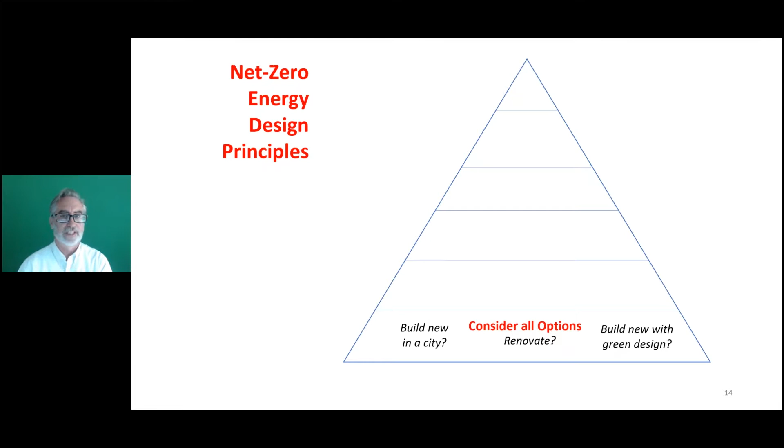So I like to focus on principles. The other panelists are going to really dig into the details of net zero. But today I want to just start you off with some principles. How do you think about net zero? The first thing you do is you consider all of your options. Should you build new in a city? Should you renovate? Should you build green out in the middle of a wonderful environment? These are questions that have to be carefully considered. Where we build and how we build has a tremendous impact on our carbon footprint.

Then we want to consider future adaptability. It's not just designing a house for now that works for the family as is, but what does a building look like that lasts for hundreds of years? And one of the things you want to do is think about how our needs will change. Certainly during the pandemic, of all times, we've seen how radically our lives can change so quickly. Good net zero architecture is going to consider flexibility to make the building last longer. And then we're going to go in and use all of these amazing passive design approaches, things that we've known for centuries.

And we've sort of forgotten in our alliance with technology, and now we're rediscovering it. The way a building faces the sun, or doesn't, has a large impact on the energy footprint of a building, not to mention our own comfort inside.

So we want to max out all of our passive technologies, because we do those once. We put a shading device on a building, we do that once, and we have it for years and years. These are passive technologies that are really critical.

And then even before we get to tech, we've got to look at the envelope. Air is moving inside and outside of your building at rates that are really causing you to use a lot of heating and cooling, and therefore emitting lots of CO2 into the atmosphere. If we can rethink our building envelopes, make them tight, make them efficient, we're going to see tremendous savings and tremendous environmental improvement.

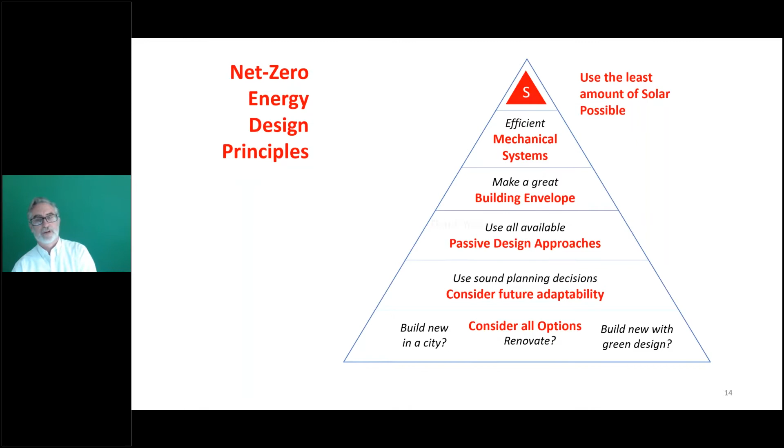And Edgar Stach, please tell us what you do. Thank you, Rob, for the introduction. So I think you really opened up the floor for talking about sustainability in a broader sense.

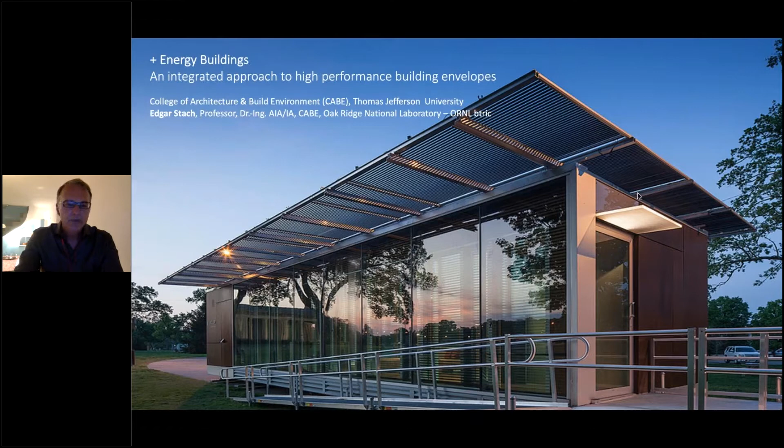Sustainability, and net zero, really goes from an urban scale to a building scale to a device scale. I want to present here quickly not only a zero energy building, but an energy plus building. This was a prototypal building built at the University of Tennessee, in collaboration with Oak Ridge National Laboratories.

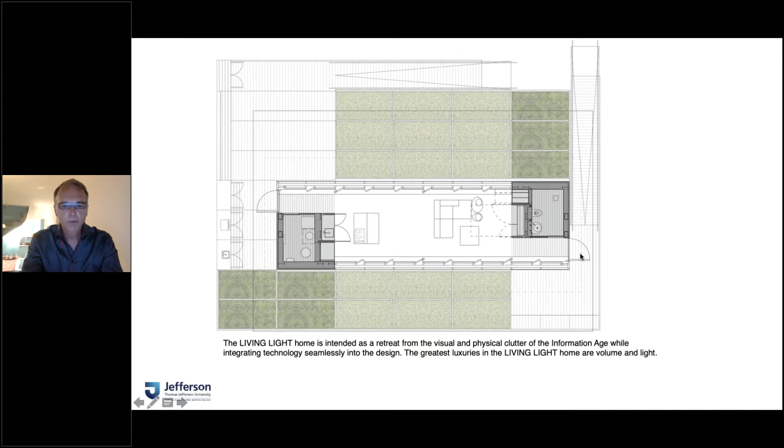It really is sort of a mini test bed to showcase what is possible today to move forward with energy recovery and technology. This is sort of a laboratory building which has two cores and a glass envelope all the way around. It's really meant to be a small starter home, or a unit which can be stackable.

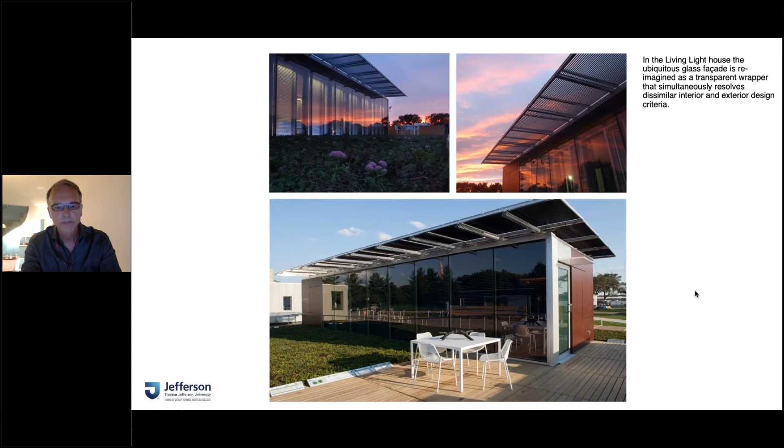So just a few images. Here you can also see the photovoltaic cell technology floating as a sort of scaffolding above the building. It's a pretty clean glass envelope on both sides. Some of the interior shots.

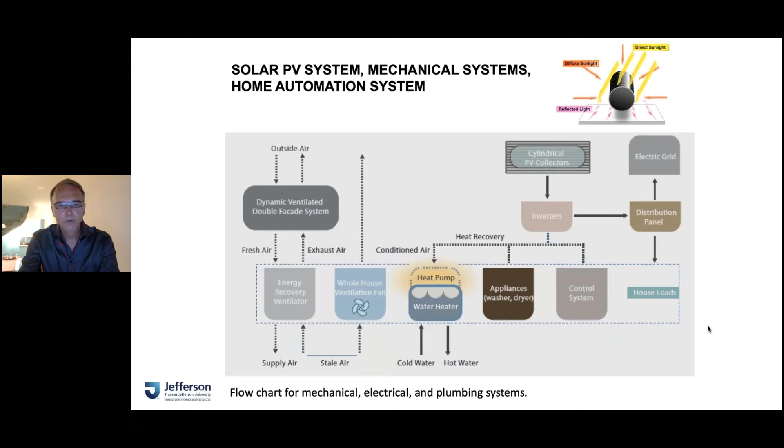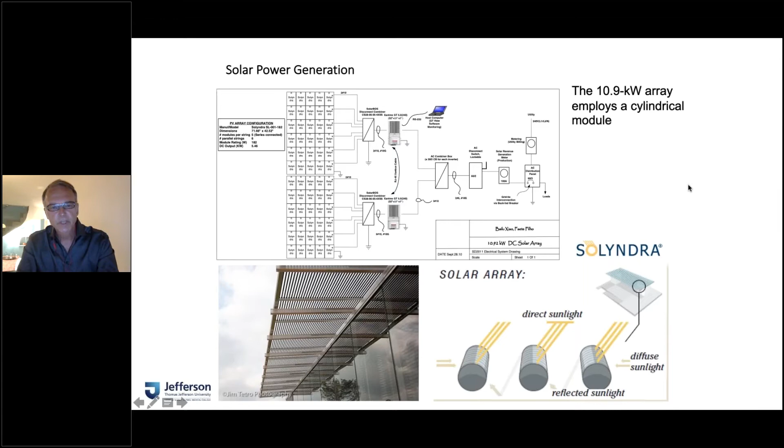So the whole house was powered by a 10.9 kW photovoltaic cell system, and these cells are cylindric. The company was Solyndra, which unfortunately went underwater a couple of years ago. Also, we use these cylindric photovoltaic cells as a shading device for the facade.

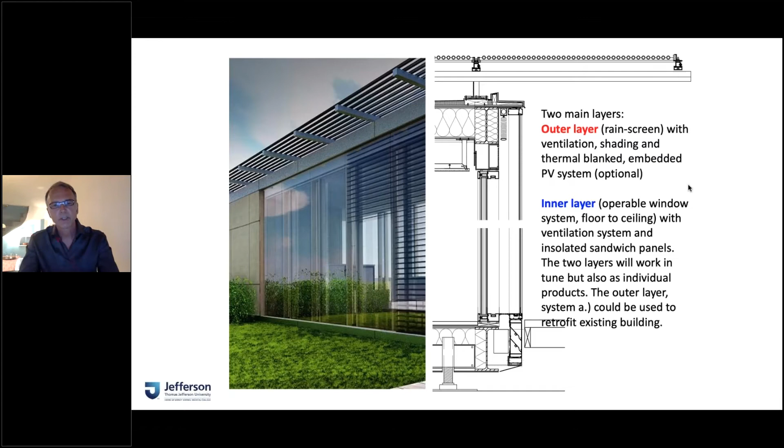The facade itself has two layers with about a foot of space in between - an inner quadruple glass layer and an outer single glass layer - and the space in between works as a greenhouse or buffer zone, so passive heating and cooling could be achieved through the facade.

And then finally, the facade panel was also linked to an air conditioning system or ventilation system, so the passively warmed air can be used inside the building for heating or cooling it.

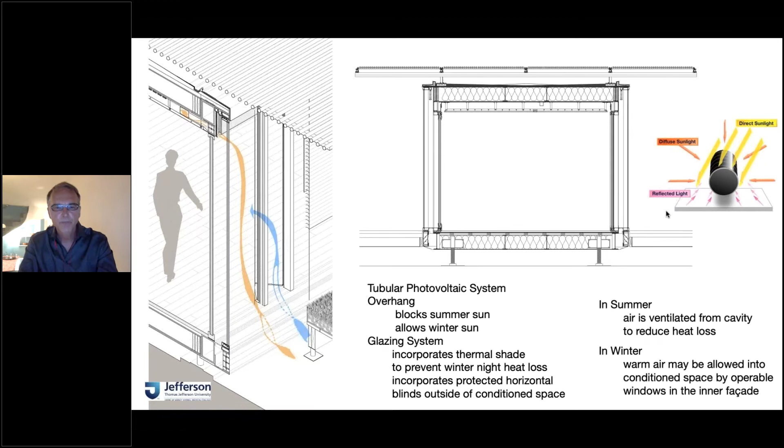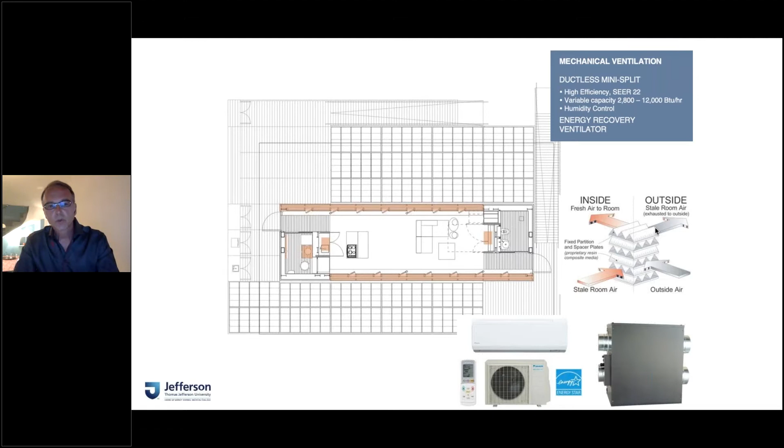We also used systems like energy recovery ventilators, a device which ventilates your house in winter or summer while recovering the energy embedded in the air. In summer, you keep the cold air inside, so you're ventilating without losing the energy embedded into the air.

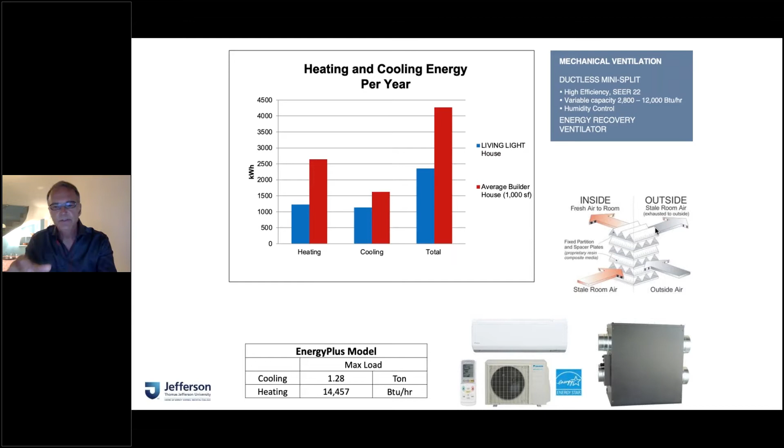So what does that actually mean in terms of savings? With technologies like energy recovery, a tight building envelope, and good insulation, this house used only half the energy of an average house built today. That's a huge energy savings, and with the large photovoltaic system on the roof, at the end of the year, you actually make money by using that technology.

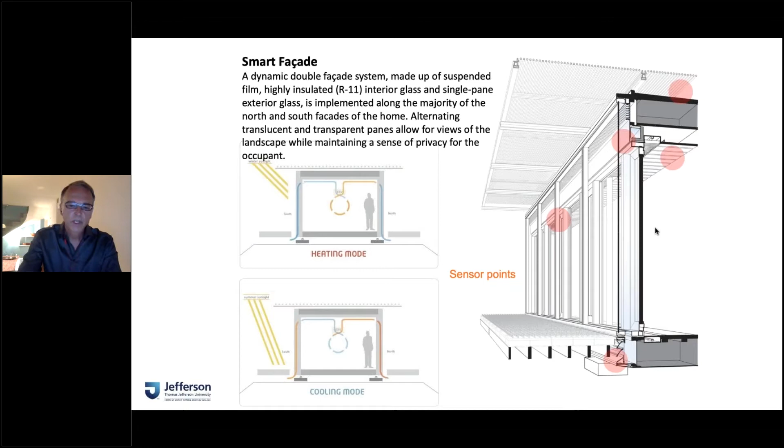So the complexity is really in controlling all these mechanisms, like the photovoltaic cells, the ventilation systems, the blinds, and so forth. You need a control system to monitor and control these things.

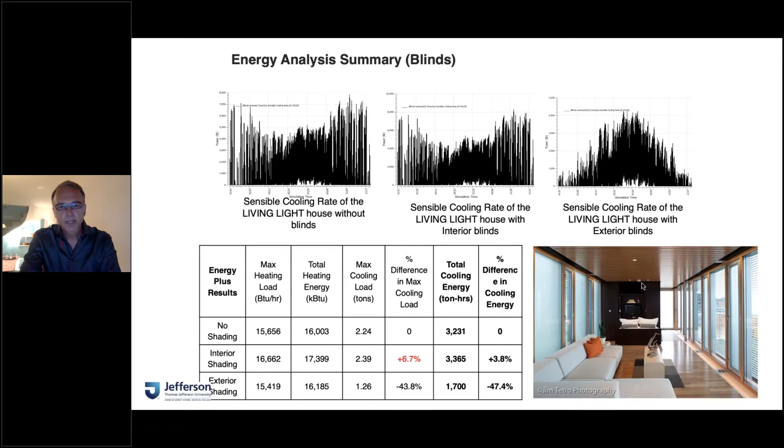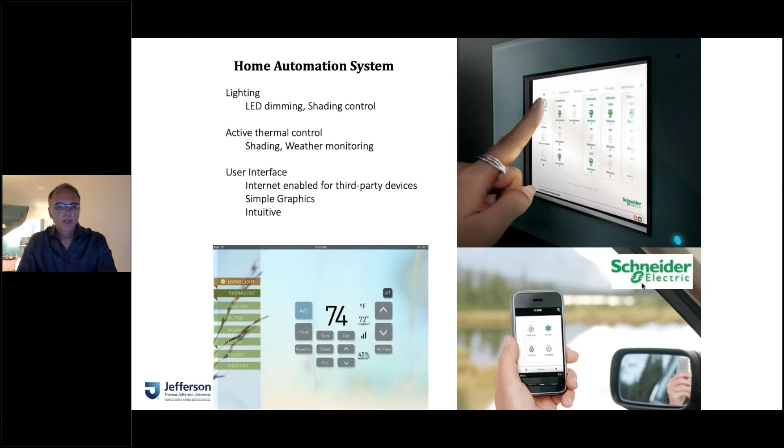Coming back to the control mechanism, if you have all these complex systems in place, you need a dashboard and an easy way to set temperatures, ventilation modes, and so forth. We also developed a system that looks into different lighting schemes and modes. You can control the media, and track the energy flow and the weather.

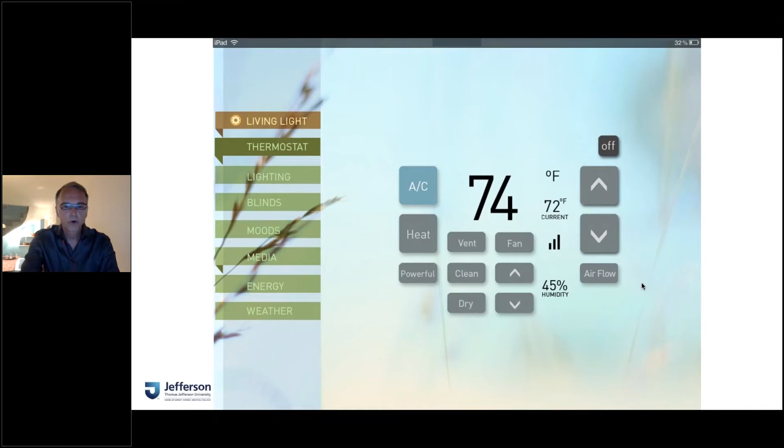The building we developed was also sort of off the grid with a battery pack system. With the photovoltaic cells on the roof, we can also power an electric car with the excess energy. And in times when the battery pack in the house was running low, we could use the battery pack from the car to power the house. So energy was flowing back and forth between the building and the car.

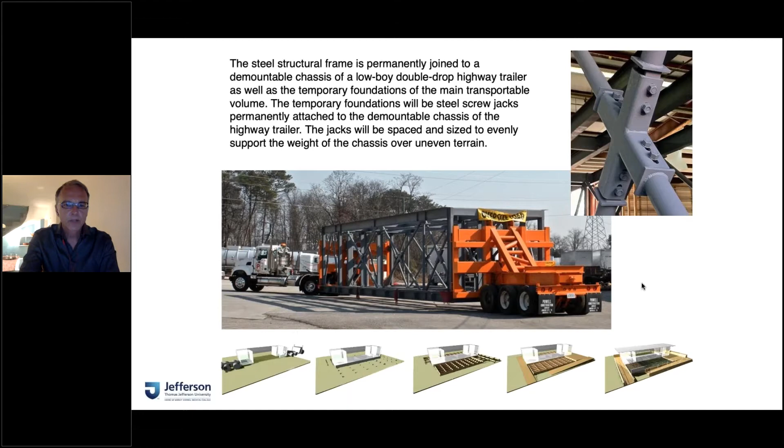Because this building was meant to be a showcase or movable laboratory, it was built on a steel chassis system, which you can see here. That house traveled to various locations to showcase the technology and really bring it to a typical American. This is the way the house was transported and traveled through the country.

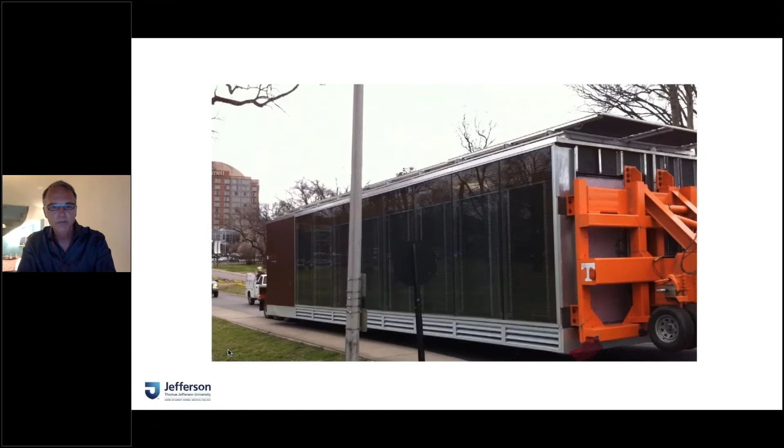And this is the end of my presentation. Thank you very much for your attention.

I should have pointed out that architects are generally not as tech savvy or interested as Edgar Stach is. Architects are often thought of as designers, and design usually connotes artistic and so forth. Several famous architects, for example, are more like sculptors. They'll think of the first woman who won the Pritzker Prize, I'm blanking on her name now, Zaha, I think, and then Gehry. They'll make some gorgeous thing out of paper mache and then turn it over to their team and say, okay, make that into a building, make it work. So Edgar is really unusual in that he's an architect who really keeps up with the technology and wants to use appropriate technology.

Now, ready for Mark Dewey, who I told you was in many ways the originator of this notion. Mark's going to tell us about this project, which he gave a funny name to, Project 1851. We won't ask him about Project 1850. It probably turned out very successfully, but he'll tell us about Project 1851. Take it away, Mark Dewey.

Thank you very much, Louis. It's a pleasure to be here this afternoon. It's very nice to spend time with Louis and Robert and Edgar. And I wanted to thank Daryl and Monica from the Science History Institute, who have helped a lot in forming the presentations that we have here today.

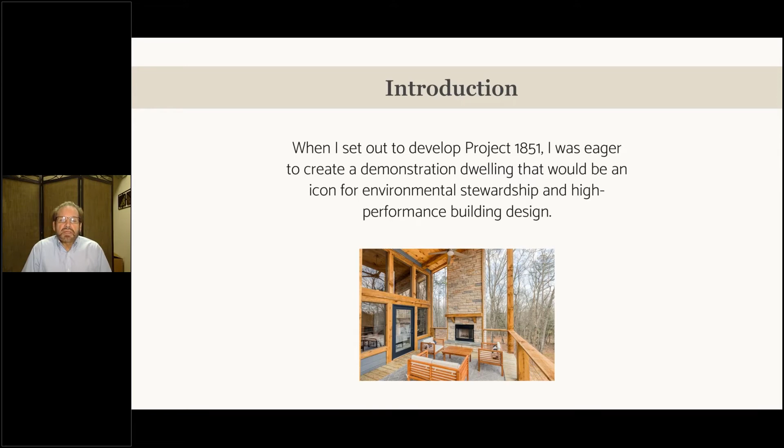So what we wanted to do was create this dwelling that would demonstrate these things all at one place and be an icon or example of stewardship and high-performance building design, and be open and transparent, with students from institutions where I teach, like West Chester University, able to come see and learn about both the fun part, seeing technologies work, and the hard part of making decisions and trade-offs financially, staying within a budget, and working with local authorities on compliance, regulation, and the EPA, all the way through to waste management techniques that are accepted and those on the verge of being accepted.

So the idea from a visionary perspective is to work in an eco-friendly environment that's still tech-rich, where we understand the chemistry, the biology, the physics, to build a sustainable building using these innovative ways of building and having a green existence.

Climate change is such that there are some municipalities and even mayors at a recent national meeting considering giving up essentially on certain land, saying we can't even make it resilient enough to manage the floods and other perturbations that are no doubt coming because of our current lack of international stewardship around climate change.

I felt it was important to pick a piece of land that was not optimal, but actually one that was very challenged from a water and flood perspective - a subpar piece of land - to show that things can be done in a regulatory, environmentally sound, and technologically appropriate way, even in difficult environments.

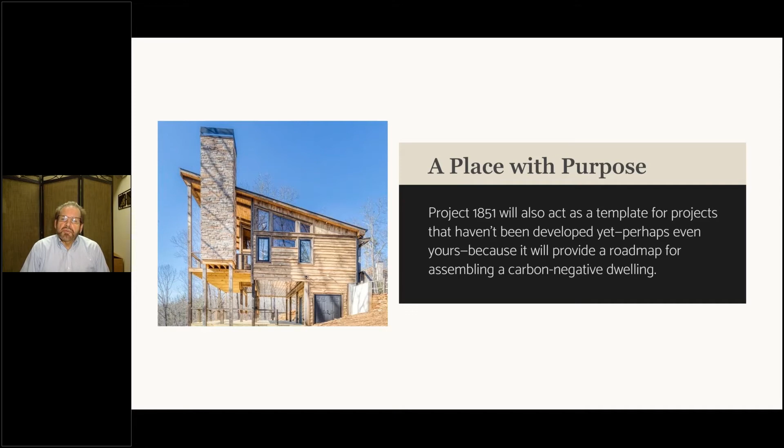So the idea is to use it as a template, so other people could come in, learn about all the details, and even use certain techniques for themselves, providing a roadmap for assembling a carbon negative dwelling. The main approach, of course, is to use solar.

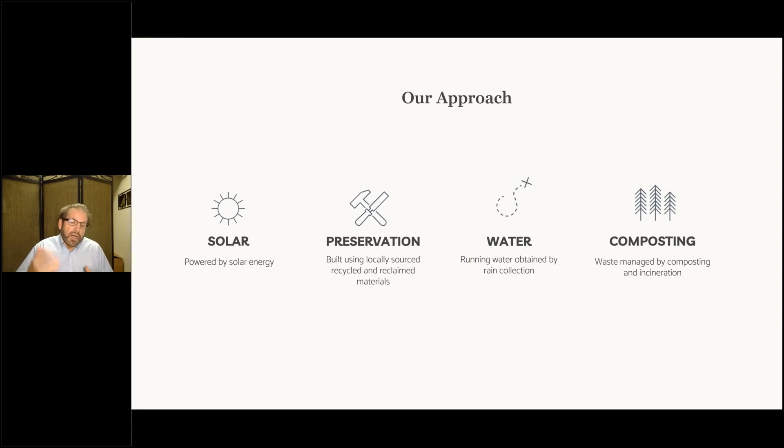One example is Brandywine Realty in King of Prussia, which was taking down a building recently on American Avenue near Allendale, and they were busting these large 6 foot by 6 foot double thermal, double pane windows with nice tint - they had over 100 of them. We asked for permission to go in, and we got it.

The location - this is now very practical, very real. It's a 1.1 acre site in historic Chester Springs, and we are currently in the stages of regulatory approval.

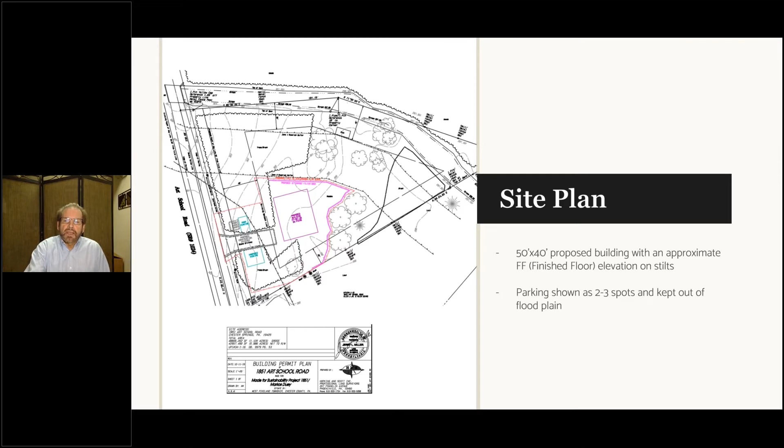This is an example of what it actually looks like. There's an actual stream - you can see it going from the top left to the bottom right. This is the worst part of the year, in the wintertime.

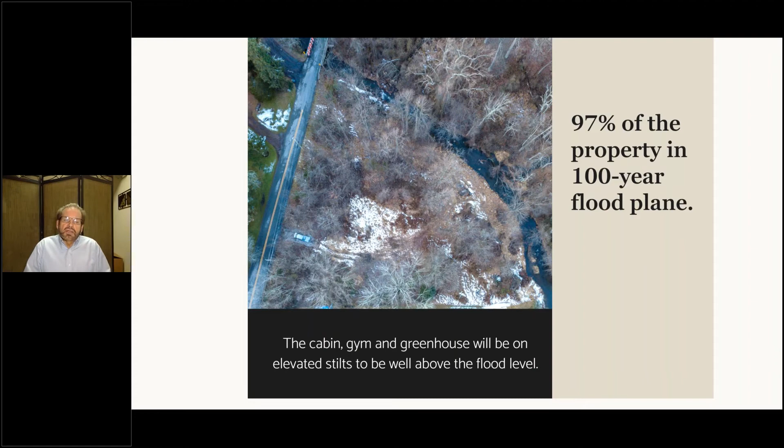About 97% of this property is in the floodplain, except where you might see that little car at the bottom left—that's the part not in the floodplain. Generally it's fine until there's a big storm, in which case there's water flowing through, so clearly the house will be on stilts, and we'll have nice views of the adjoining forest and interesting trees, as well as a view of the creek.

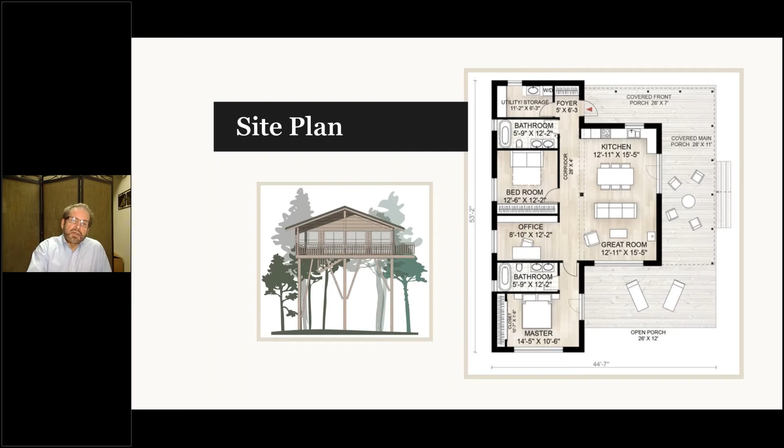The key thing is that as a demonstration project, we want to have a significant learning palette. We'll offer the opportunity to experience and learn about sustainability leadership. And of course, we're not leading, we're copying, or bringing into an integrative environment things that exist and have been designed elsewhere, but bringing them together to coexist and work together.

I'm sure some things will work well and some might not, and we'll be transparent about those things. But having a biophilic and advanced tech house design, each time we learn something new, we're trying to do it like an algebraic equation, where like in software we have APIs that you pull in and pull out. We'll try to design it for the future, so as new technology comes online and becomes realistic and available, we'll try to incorporate it.

People can learn about real estate development in challenged geographies instead of running away from these challenges. Building green so that every aspect of the design, the building, the chemistry and biology is considered, so that the impact on the environment today, in 20 years, and in 50 years is considered.

The construction management process itself changes as a function of the perspective you have on the materials and to what degree they're recyclable. And of course, the overall positive greenhouse contributions of having and growing food on a year-round basis nearby.